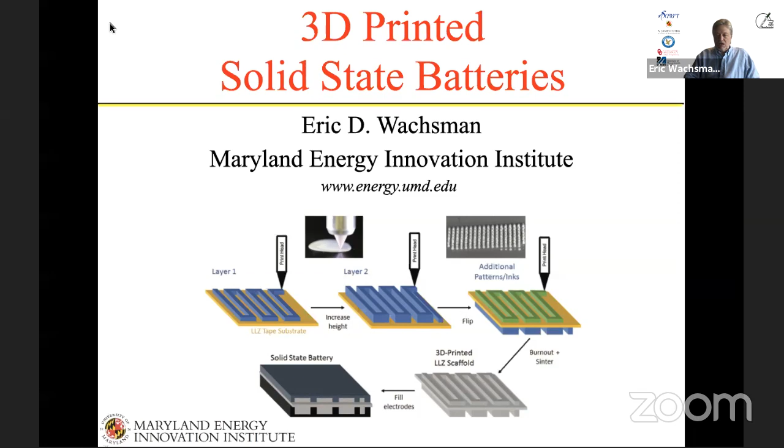As far as the range of cathode materials or battery configurations known in the world, this particular material is thermodynamically stable in contact with it, and again has conductivity comparable to some of the conventional electrolytes. They're made from relatively inexpensive elements, lanthanum and zirconium. Some of the dopants can be more expensive, but they're in a small quantity. And of course, there's lithium, but if you're going to have a lithium battery, you're going to have lithium, so that's no worse than any other.

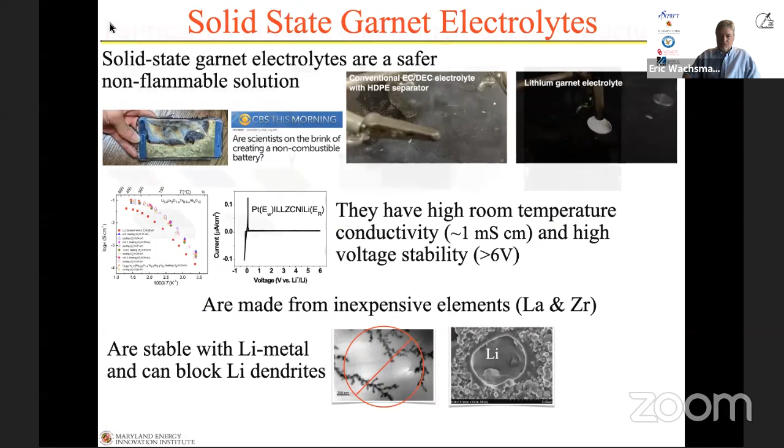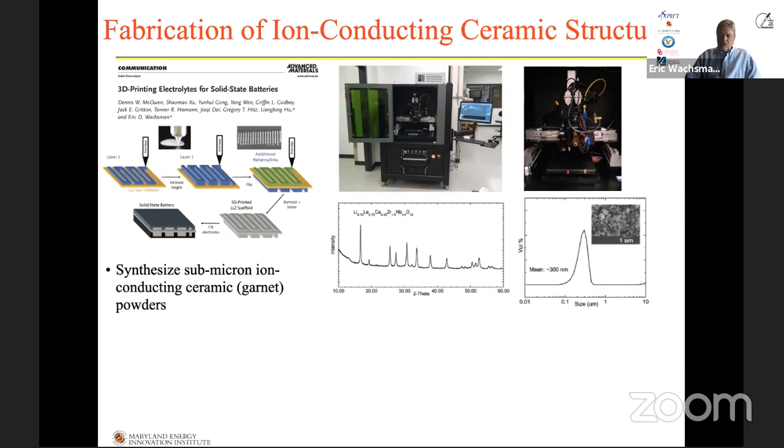The first step is to synthesize your ion conducting ceramic, in this case garnet, and there's the composition of one of them. They have to be sub-micron size, so you can see a volume percent versus size plot there, and an SEM image of some of the powders. They're on the hundreds of nanometer scale range that allows them to flow through the capillary on the 3D printer.

With these types of ceramics, we would then follow that with a drying and sintering step. I won't go into more detail, but typically they are sintered at around 1,000 to 1,100 degrees centigrade.

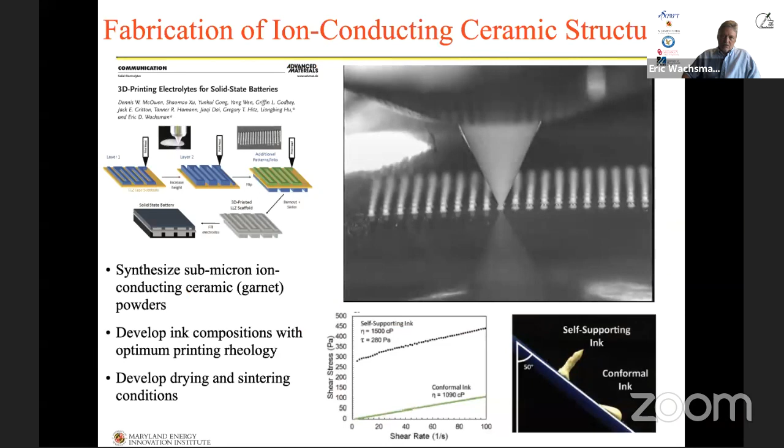There's a number of different structures we can make. This is what we call a tri-layer, with a porous, dense, and porous layered structure. In our batteries, we fill the porous structure with electrode materials, lithium metal on one side and whatever the cathode may be on the other. You want that separator layer to be dense to prevent shorts between the two different layers.

We also make bilayers, where again we have a thin, dense film supported on a porous layer. We've even been able to make self-supporting dense films on the order of about 5 to 10 microns using these types of materials.

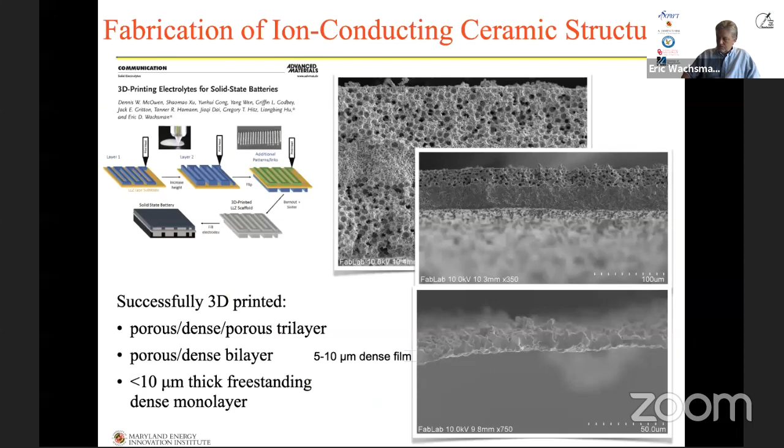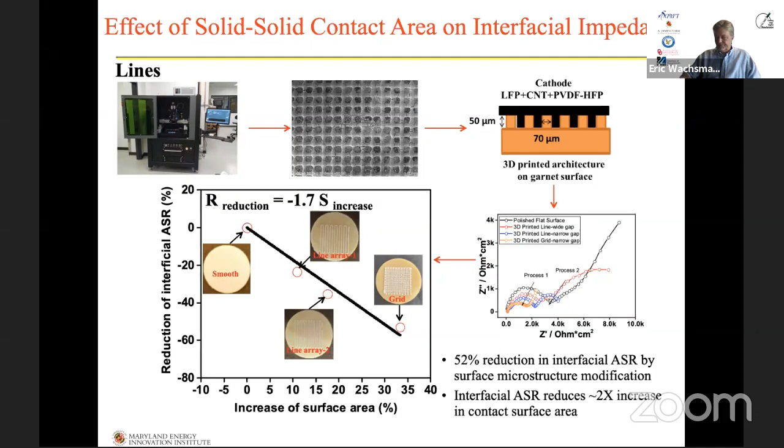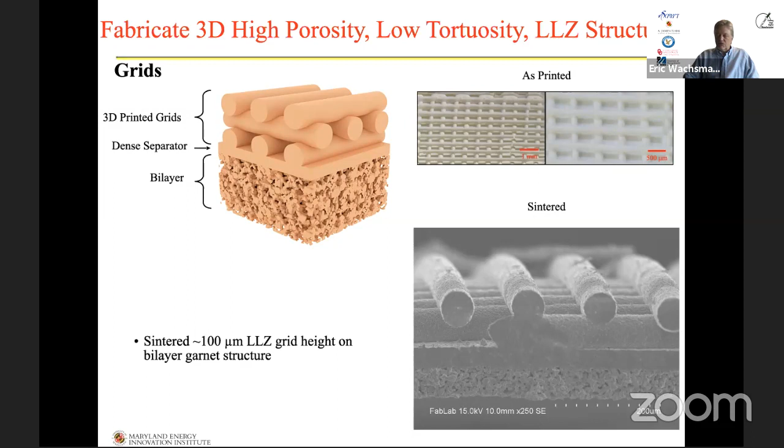They can cycle back and forth because of the high conductivity of these garnet materials. Moreover, the impedance of these things is very low, again because of the high conductivity of the material, but also because its extended three-dimensional structure allows for high surface area.

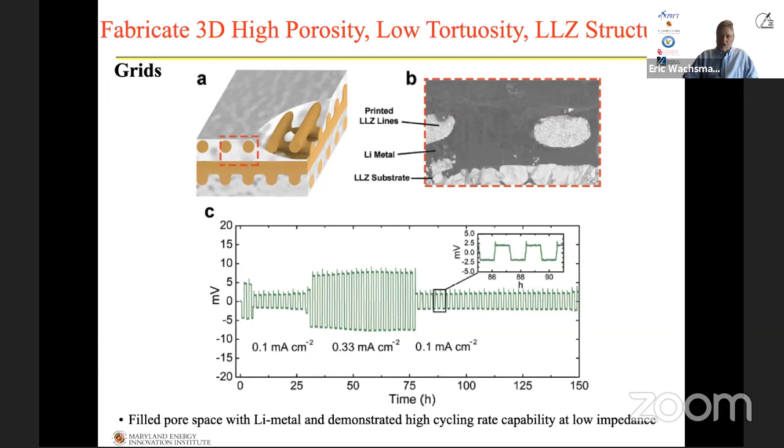This is another structure we made - these are columns. You can see the graphical representation on the left, the as-printed photograph, and the SEM images of these sintered structures. They're about 200 microns in height, very uniform across that surface.

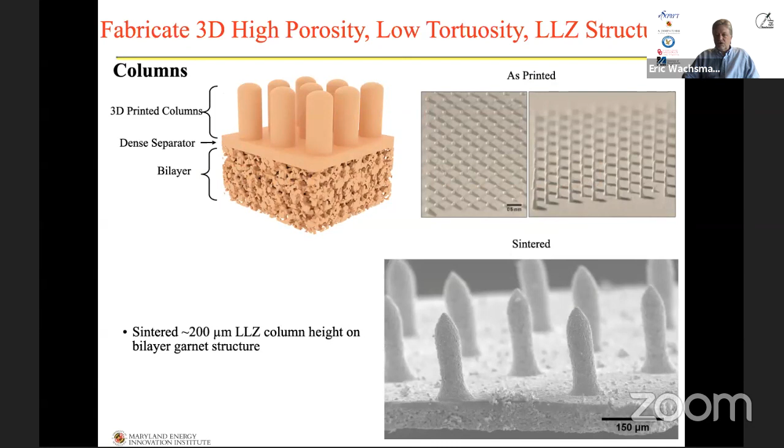Now what we're going to do is fill them with a cathode material that we'd use in batteries. NMC is a nickel manganese cobalt material. It's very common in batteries - one of the higher performing ones.

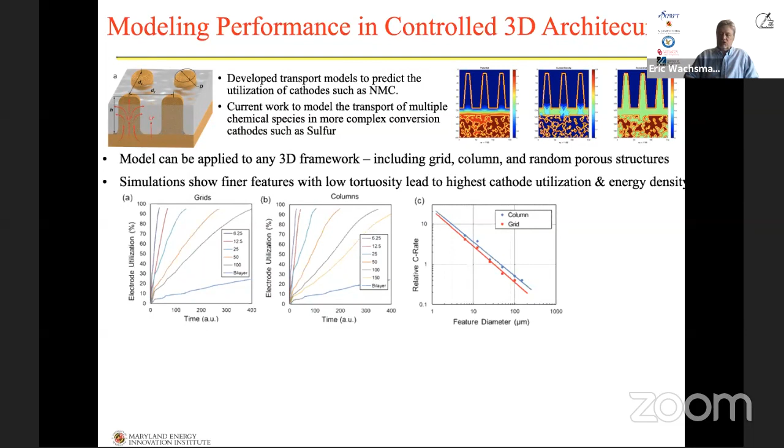That's shown in the figure to the right, the relative C rate. C rate for a battery is the charge rate, how fast you can charge and discharge it, versus the feature diameter on these grids and column structures.

The other aspect for grids is where do you place them? Do they directly overlap each other, or do you have them staggered? What we're seeing from the modeling results is you actually want to have the grid structures staggered, so that as you have these different lines, one line overlaps the pore on the layer below.

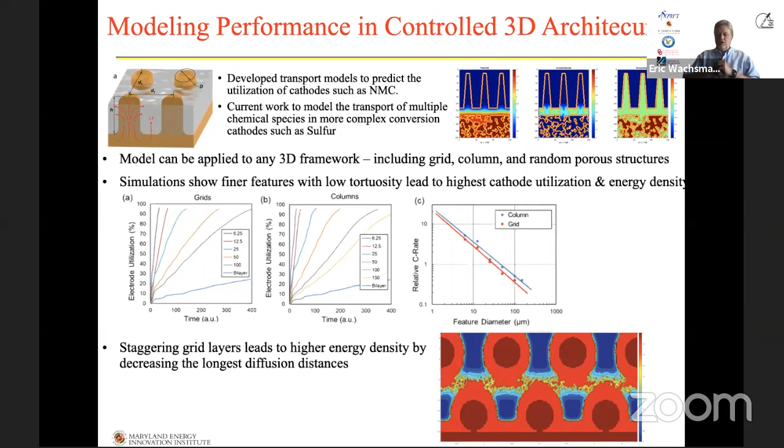Ultimately, we want to be able to calculate what type of energy density we would get. This is for lithium sulfur cells that we've been making, not 3D printed, but made using conventional tape casting and laminating and firing. We're making these lithium sulfur cells and getting on the order of about 280 watt hours per kilogram.

If you're familiar with batteries, your best Panasonic is somewhere around 240 or so. So it's actually a higher energy density than conventional batteries today.

But now we have the ability to look at how we tailor the porosity in these structures and how that affects the overall cell energy density. What we're seeing is that if we make this all 3D structure type battery, we can potentially get around 940 watt hours per kilogram, about 3-4 times that of conventional batteries on the market today.

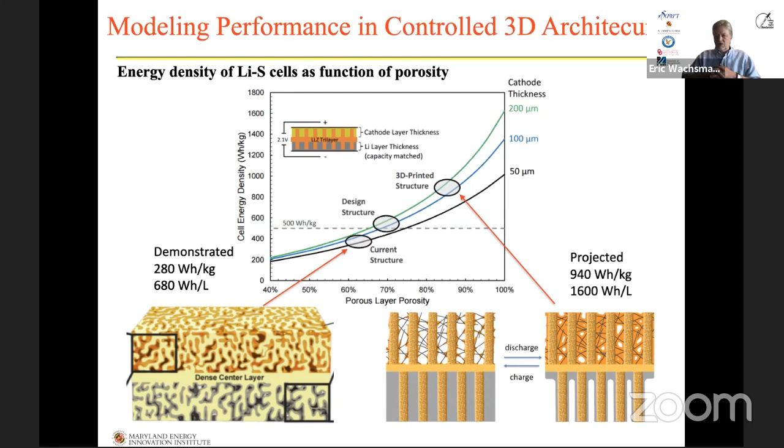I think I made my time. I want to thank the postdocs and grad students working in my group, as well as the Department of Energy for its funding. I thank you for your attention.

That was wonderful. Perfect timing, Eric. Appreciate that.

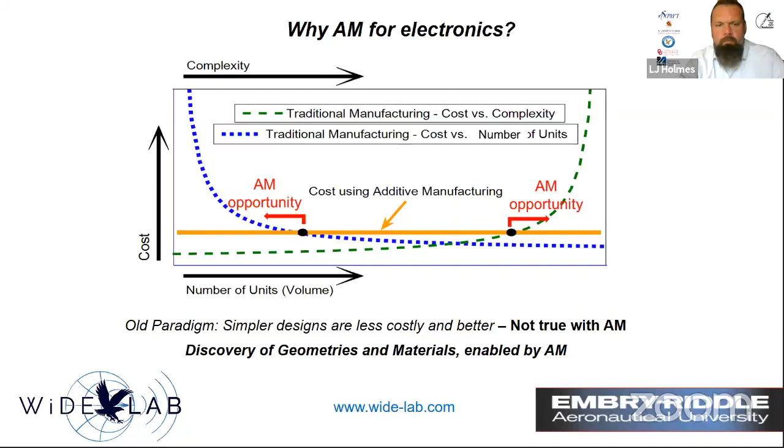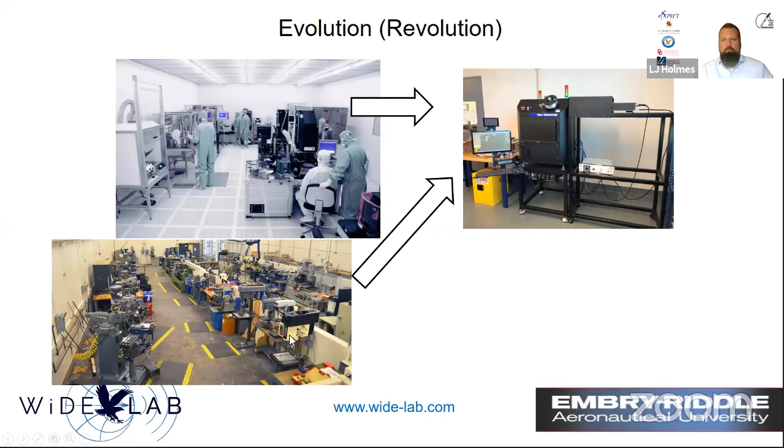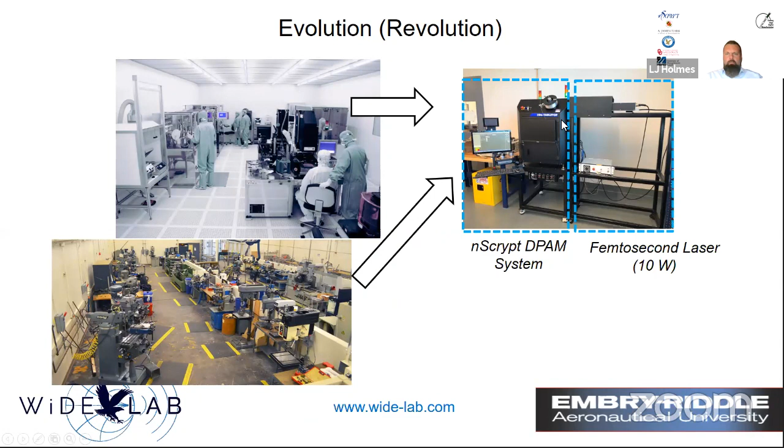So the evolution, or perhaps the revolution, is going from a clean room with a controlled environment, advanced multi-billion-dollar equipment and infrastructure, or a machine shop where you get parts and do subtractive manufacturing with all this equipment in a large room, to solutions like the nScrypt tabletop, where you can additive manufacture using micro dispensing or fused deposition modeling, or also do subtractive manufacturing, for example with a femtosecond laser, all in one system, going from a digital file to a part.

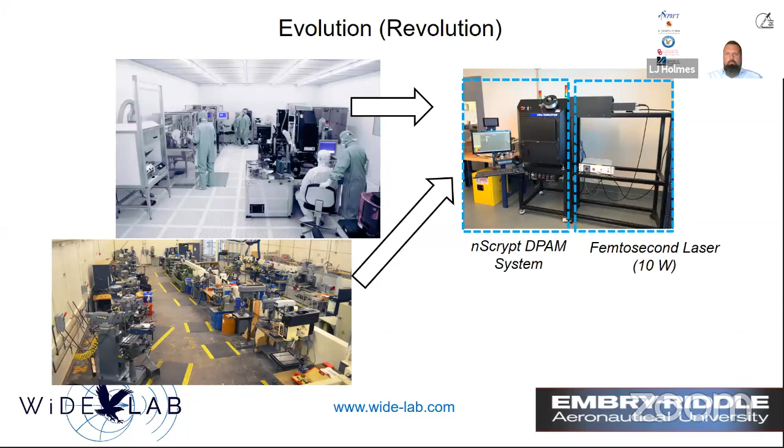So that's really what I call the evolution with additive manufacturing, or digital manufacturing in a more general sense.

A little bit about our lab. So we are at Embry-Riddle, in the John Mica Research Complex. It's a brand new building, as I mentioned, only 3 years old. We are here in Daytona Beach, and we have nice weather today.

And the lab, we have 2,000 square feet of RF labs on the second floor, as you see in the slides. Things we have been building since I joined: we have a picosecond LPKF proto laser for PCB manufacturing, RF probing, a far field anechoic chamber for antenna measurements, 12 by 12 by 25 feet. We can do S-parameter measurements and signal analyzer measurements up to 67 gigahertz, covering millimeter wave frequencies, for example 5G applications.

And then we have our nScrypt tabletop with a femtosecond laser, among other equipment. Of course, we are an aeronautical university, and we focus heavily on aviation, aerospace, and space applications. So we have in the lab a ground station for satellite tracking, actually 2 ground stations, so we can track 2 spacecraft simultaneously, at frequencies S-band, UHF, and VHF. And I'm going to talk a little bit about a space application shortly.

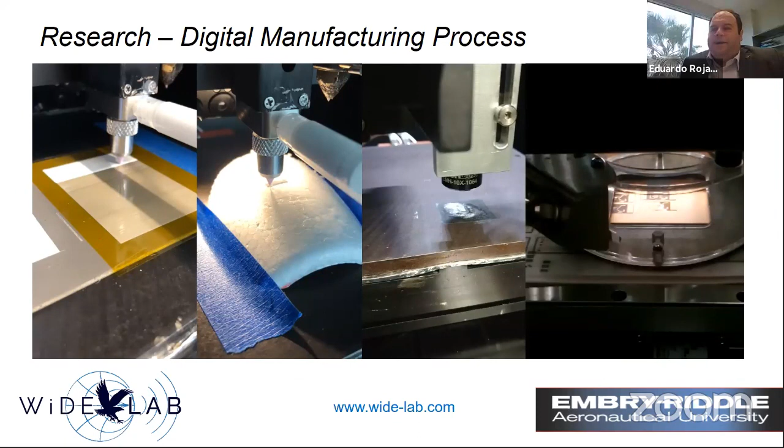So additive manufacturing, as I mentioned, enables manufacturing things that are not easy or even not possible to do with traditional means. And here's a set of videos of what we do in the lab.

So here is a foam frame of an aircraft where you can print conformal antennas and RF circuits, shown in the second video. And then we use laser, as you see in the third video, for fine features on the order of 10 microns, for obtaining those feature sizes needed at higher frequencies.

For example, for millimeter wave, you need smaller feature sizes. And as I mentioned, we have a more commercial LPKF system for PCB manufacturing, and we're also looking at processing of printed parts, as you see in the last video.

So as you see in the lab, we use both additive with micro dispensing and fused deposition modeling, but also subtractive with the lasers. I'm going to cover a few of the research initiatives we have going on in the lab.

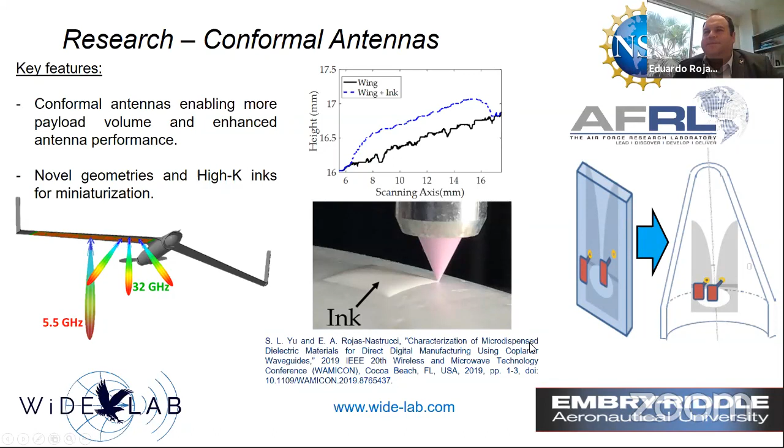Also, with our collaborator from AFRL, we're looking at moving planar antennas to 3D conformal surfaces, for example in radomes. The advantage is freeing volume inside the radome and moving things to outside of it, so you can use that volume for other purposes. That's the concept of conformal antennas directly manufactured on the surfaces.

Another initiative, funded by NSF, is bio-inspired antenna geometries, freeing our mind from the traditional engineer who thinks in 2D and going to 3D. We got inspiration from flowers for this one.

This is our very first work, published on looking at a patch antenna and making the pattern wavy. We effectively increased the electrical size while the physical size stays the same, so you get miniaturization of the antenna, going from this planar patch to a wavy flower-like patch.

You can reduce the operation frequency if you keep the same physical size, in this case from 5 gigahertz down to roughly 4.5 gigahertz, or miniaturize the antenna if you keep the same frequency. Here are the measured and simulated S11 and radiation patterns, showing the behavior is very similar.

We also collaborate with colleagues from the aerospace engineering department on space applications. One issue NASA and the space community are looking at is orbital debris and micrometeorites. As there is a lot of debris around Earth, there's a high risk of impacts from these micrometeorites or orbital debris.

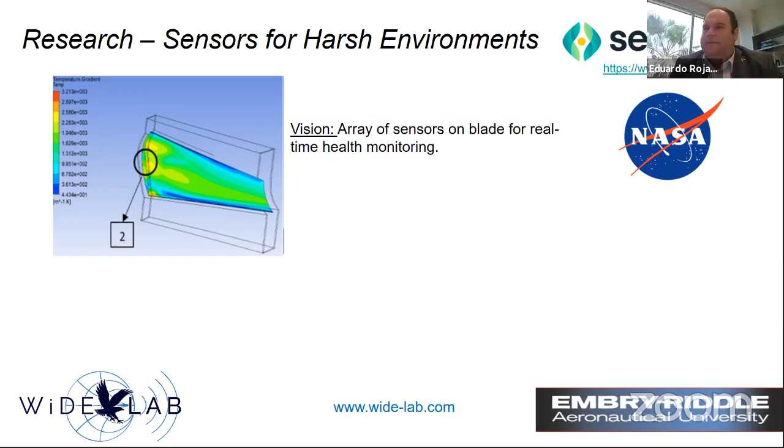That's really the vision of the company, and we're working with them on using additive and subtractive manufacturing, which is imprinting patterns with conductive ink and laser machining cavities and features to fabricate these high temperature and pressure sensors. You see here examples of the samples we have fabricated with them.

And Eduardo, you've got about 2 minutes. Okay, so I'm going to move faster then.

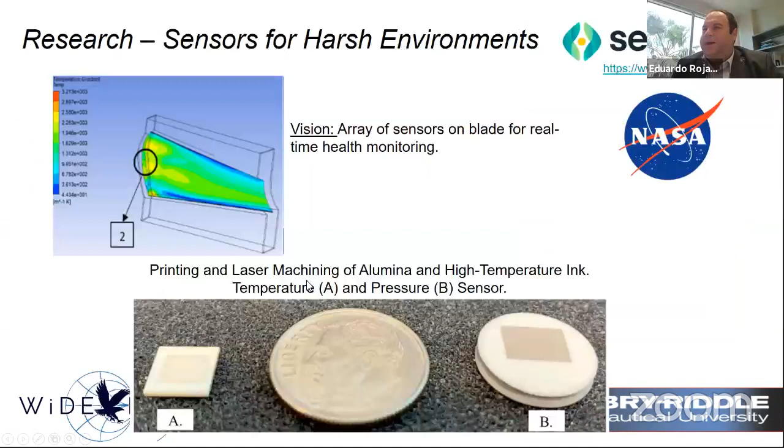We are working with Intuitive Machines, which is also working with NASA and the CLPS program, to make a lunar lander that is going to the moon, hopefully next year in the fall. So we're working with them on the wireless systems, both to Earth and on communication on the lunar surface. Unfortunately, I cannot share much details, but we are also working on an ISS experiment that will launch in October. So this is, I guess, a tease, and we'll share the details in the next edition of these seminars.

I guess the vision is, on Earth, we can discover novel geometries and materials that are enabled by additive manufacturing. So there's a triad there — they are interconnected: geometries, materials, and additive manufacturing processes to advance society. And then from the space point of view, ad hoc design and manufacturing is really an enabler for space exploration. There's no way you can have a stock of parts in space, and if you have a problem and don't have that part, you have to wait months or years until you get it there. So the space industry is really focused on additive manufacturing as an enabler of space exploration.

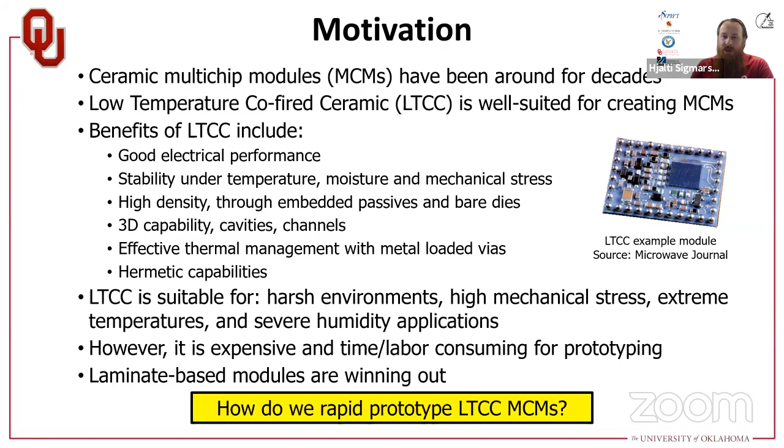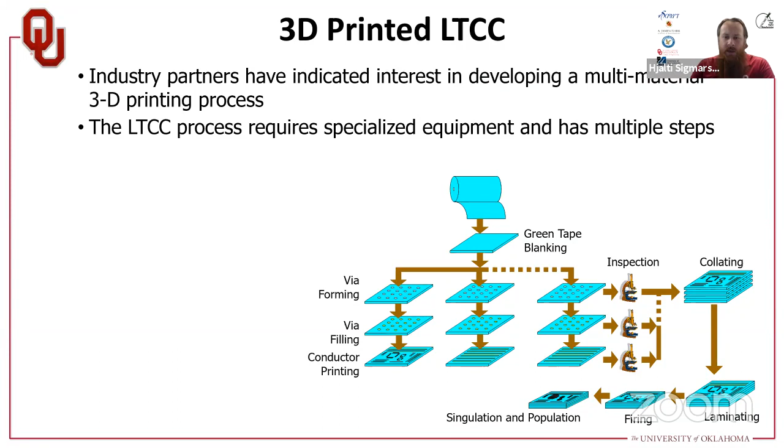To do that, we need several things. Just to emphasize the complexity of the LTCC process in general, it requires multiple steps, usually multiple machines. You have to take your parts from machine to machine, with very specialized labor for each step, and overall it's just a fairly complicated process.

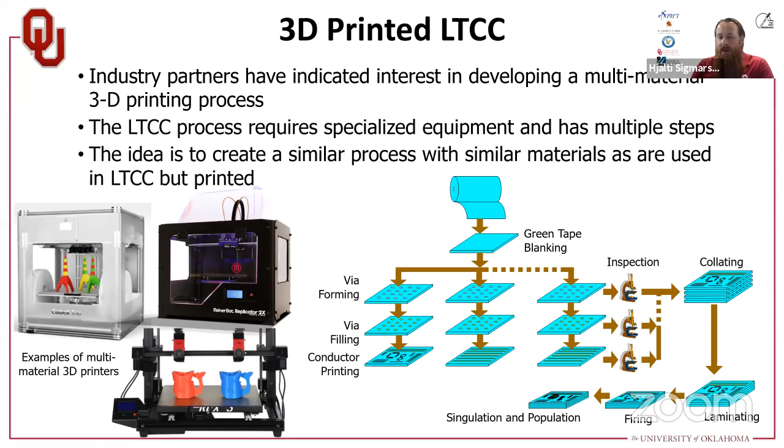So the thought process is, can we somehow utilize some of the evolution of 3D printers? We started seeing a lot of multi-material printers, like fused deposition modeling printers that print multiple filaments or materials at the same time. Can we emulate this type of process with ceramics?

There are several challenges we need to overcome, listed here in no particular order other than what came to mind. One of the big problems is materials - we need multiple materials to create a multi-chip module.

We need dielectrics for the substrates, and conductors for making the interconnects and vias. We also want some more advanced materials and other dielectrics, high K materials - I'll talk more about the advanced materials in a later slide.

Some concerns have to do with the particle sizes of our materials. If we're going to extrude or dispense, we need to be mindful of particle size, which also dictates our grain structure, porosity and such.

The printing platforms themselves, although with all these low-cost 3D printed FDM printers being widely available, they're potentially just not good enough for high frequency, high quality circuits. Current LTCC processing deals with about 2 to 4 mil lines and spaces, about 50 to 100 micrometers, while typical FDM printers might be dealing with 10 mil, 20 mil holes and dispensing capabilities. So we're not going to use a $1,000 printer to make LTCC.

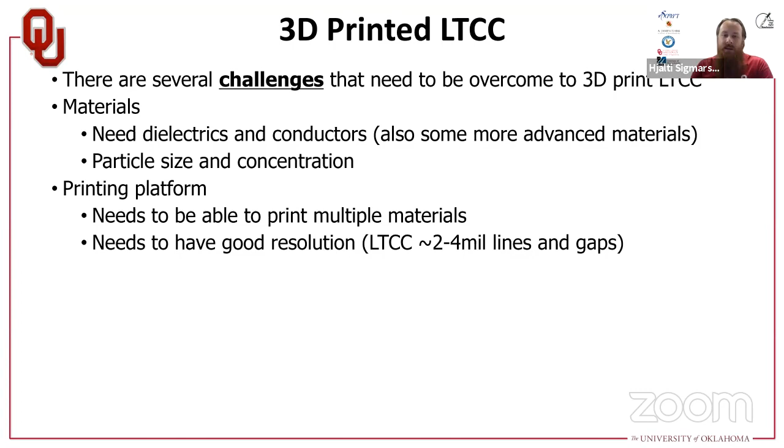We know that. So what do we need? Well, we have a lot of other platforms, and I'll talk about that in a little bit. One of the major challenges of doing 3D printed ceramics - and this goes a little bit to our first speaker's discussion on drying and sintering - cracking is a major challenge for 3D printed ceramics and sintered ceramics.

As an example, or for comparison, in traditional processing of LTCC, the tape itself is dried in very well-controlled conditions for a very long time, and there's a reason for that. The sintering process is also relatively slow - drying and sintering can take a lot of time.

So one question we should ask ourselves is: is it really feasible to try to print these things, given all these challenges? Should we solve these challenges or not? As academics, of course, we want to tackle these things - it gives us something to do, I guess.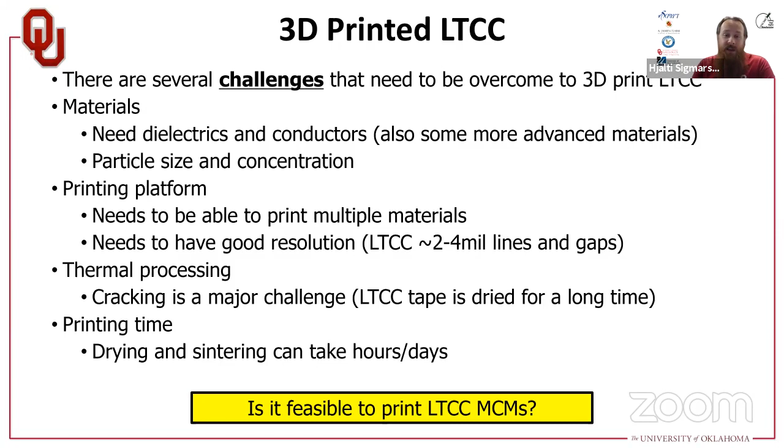So what we've done here is we started off with some materials from Heraeus. We had this X200 powder that they make tape out of. We went and sourced the raw materials from them, got the powder, put that into a liquid suspension using the monomer with some dispersant, and mixed it up pretty nicely. Then we put it in a syringe and dispensed it, and we were able to create relatively decent sized boards - about 50 mil thick, if I remember correctly.

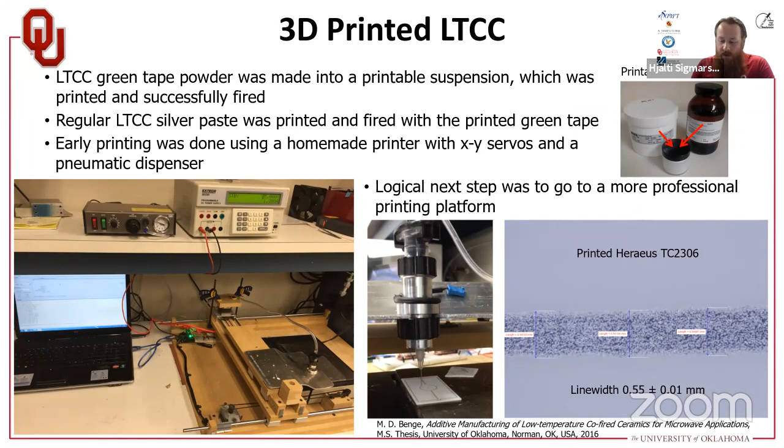We used a pneumatic dispenser with some servos and created this little printer that we see in the middle. We were able to print both the ceramic suspension and, on top of it, the conductor paste, and fired it all together, and it actually came out quite nice. However, the homemade printer just isn't good for high accuracy. We had okay accuracy, with a repeatability of about 10 to 20 micrometers on these printed lines.

So recently we got an nScrypt printer, one of these gantry units, which was funded through the Air Force. Big thanks to the Air Force through their DURIP program. We ended up getting a 3Dn-300 printer with 4 smart pumps. We decided to go with 4 smart pumps, and I'll talk about why in the next slide.

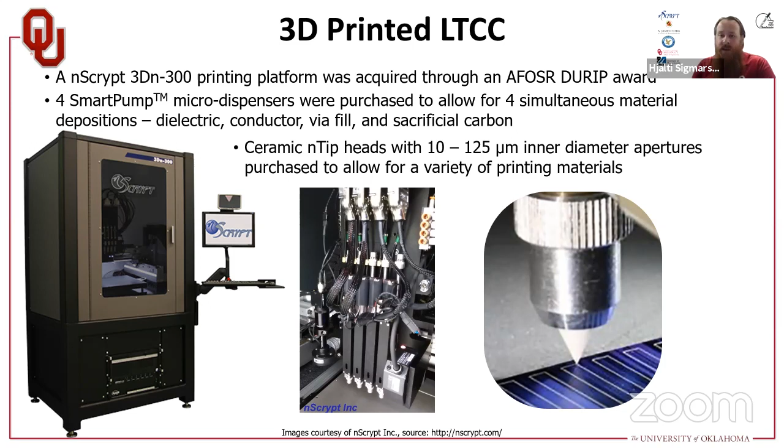In general, we wanted to be able to put down 4 suspensions at the same time, so we can do our substrates with our dielectrics, our connections, and actually use a different conductor for the via fill, since it needs a different sintering performance. So we fill vias with a different material, and also use sacrificial carbon, which I'll explain later. We also got a variety of ceramic tips, and we're experimenting with which suspension works best with what inner diameter aperture.

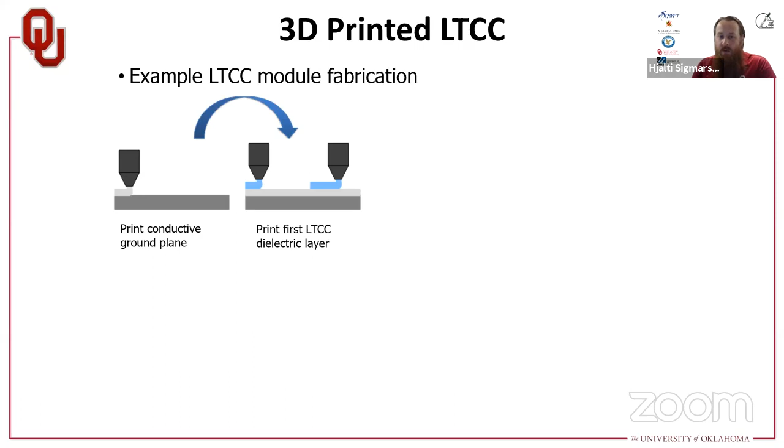So how do we envision doing this module fabrication? If we start off by just printing a ground plane, for example, assuming we're building some kind of circuit, we start by printing our layers—maybe print a conductor layer, then print some ceramic, some LTCC, on top of that.

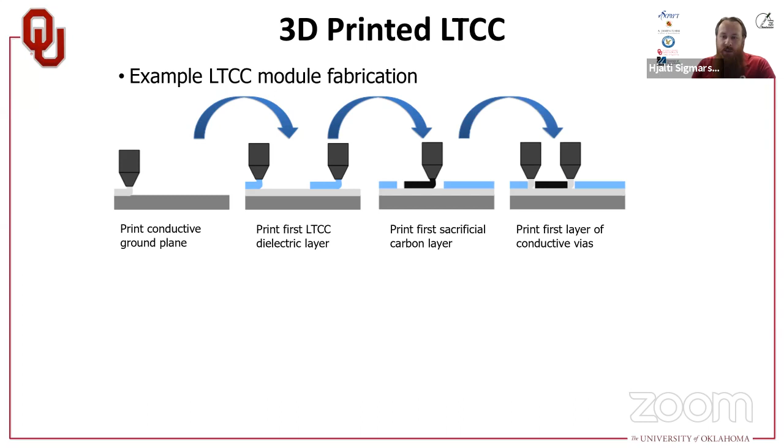Here's an example where we'd put down a sacrificial carbon layer if we want to create some cavities or channels. We print some carbon in there, continue filling vias, and that repeats—we keep building layer by layer until we end up with a complete part. Eventually we fire that part, and during firing, the carbon paste actually burns out quite nicely.

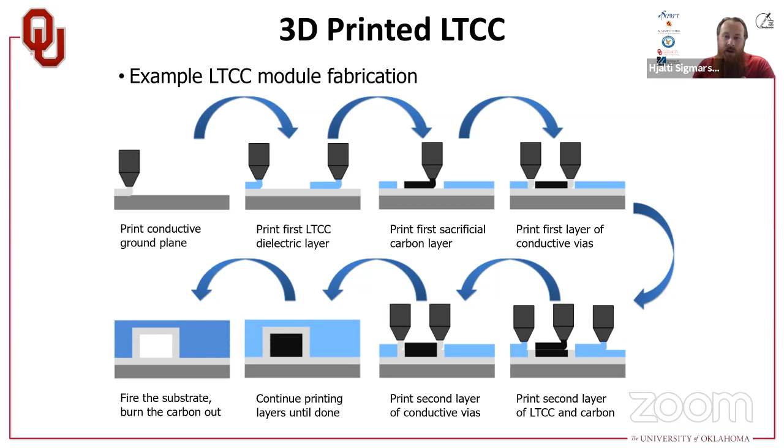So the idea would be to create some kind of module like this—a printed TR module, or transmit-receive module, where we end up with pockets for chips, embedded components like inductors and capacitors, and multi-layer antennas built right into the board itself. That would be the ultimate goal: to build everything into one thing.

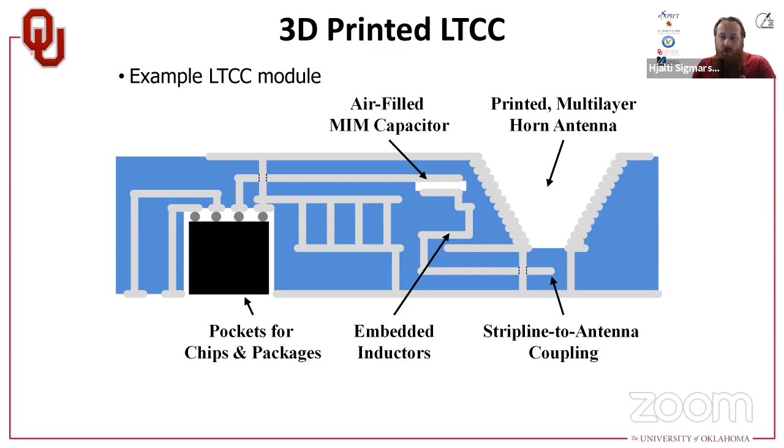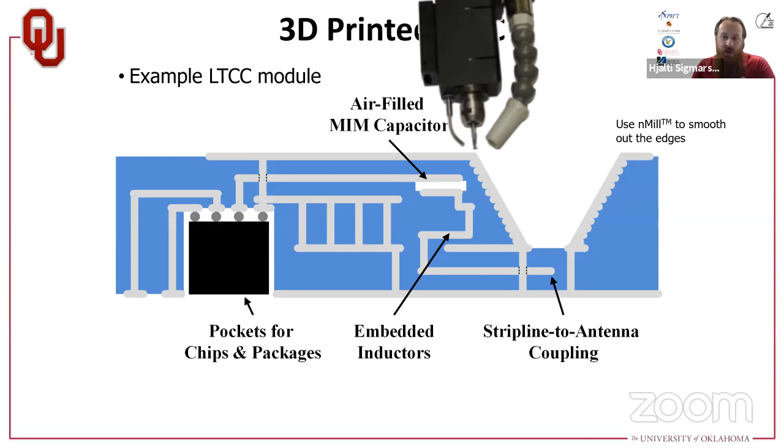Now when we do stuff like this, we end up getting a certain amount of surface roughness. This is where a platform like the nScrypt comes in and could do wonders—let's say we use the nMill, a milling head that can be added to it. If we smooth out the antenna, for example, we could potentially get much better performance at higher frequencies, since surface roughness greatly impacts performance at those frequencies.

Another project we worked on with LTCC-type components was: what if we use our $1,000 MakerBot—or really more like a $2,000 printer, though I'll say for the record I bought that particular MakerBot 2X for $900 used, so it is a $1,000 printer. But can we make filaments with ceramics in them and actually create ceramic parts?

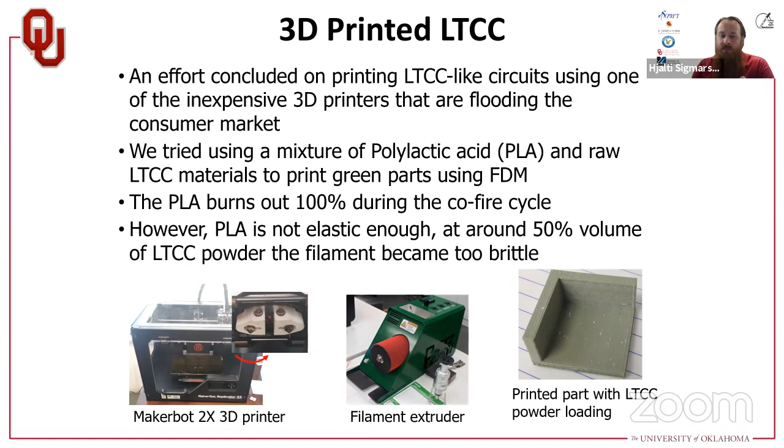First we started with typical polylactic acid, PLA, but the problem was it was just too brittle—we couldn't get high enough ceramic loading into the plastic to burn out the PLA and be left with a good enough ceramic matrix that would sinter rather than fracture into dust. So we moved away from PLA into PETG, which is way more elastic, and we achieved about 71% filling of powder with this Heraeus X200 powder into a filament. We were able to use a MakerBot printer to print a part, fire it, and get some nice parts out of it.

So that was actually quite exciting, being able to print out of a $1,000 printer a ceramic part. This is just a graph showing the different profiles we use. We have to slightly adjust our profile for doing the sintering for the PETG, needing a bigger dwell to remove all the particles and doing it a little bit slower.

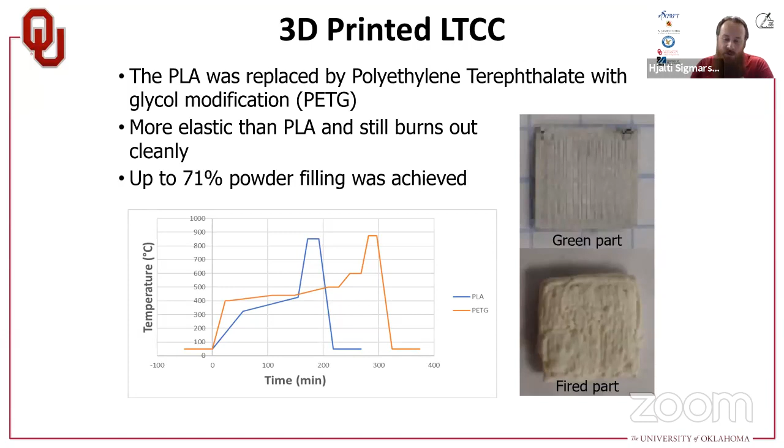So what about other materials? I hinted at doing some more advanced materials earlier. It'd be nice if we could start printing materials like ferroelectrics that allow us tunable things, magnetic materials, ferromagnetics, some piezoelectrics. If we can print things that are functional after printing, with physical movement, that would be nice. And then there's phase change materials.

Phase change materials are basically a family of materials where, by doing some thermal excitation with different profiles, you can change it from being an insulator to a conductor and vice versa. This has been a hot topic recently for doing RF switches, with very good performance, low loss, and good isolation.

So Doctor, you have about 2 minutes if that's okay. Yeah, okay, I mean I can speed up a little bit.

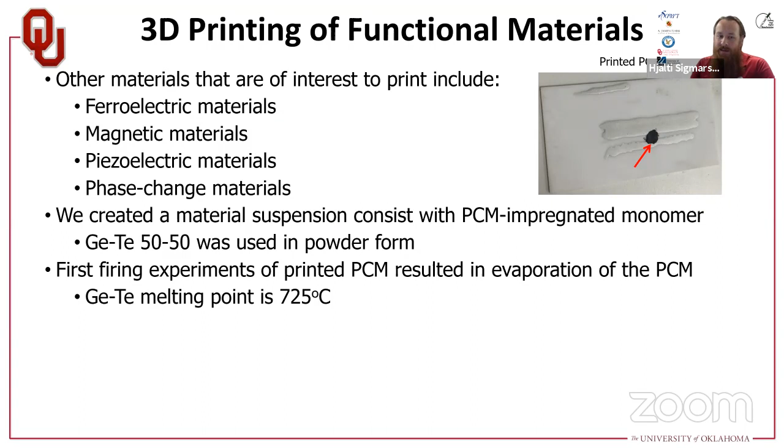Anyway, so we took the Ge-Te 50-50, which is good for getting low loss, and we put that into a monomer as well, and we tried to print that. However, we failed to take into account that Ge-Te actually melts at 725 degrees Celsius, and the LTCC process is about 850, so we ended up evaporating all of our Ge-Te. But still, it's something we want to be looking at.

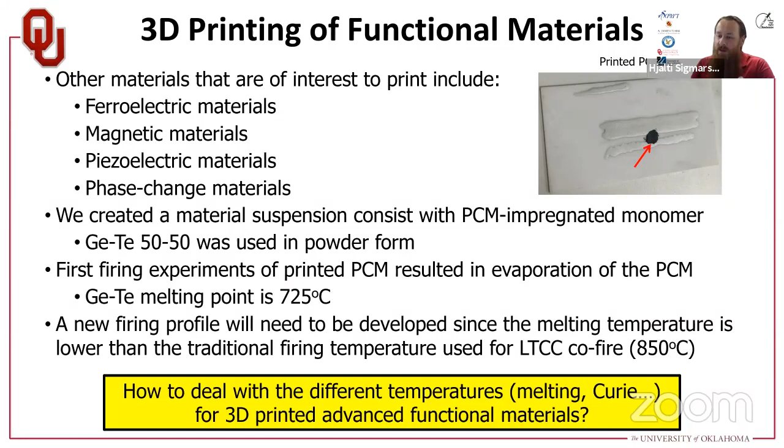It would be pretty cool to print all these different materials, but there are challenges, like how do we deal with these different temperatures? If you're printing a piezo material, for example, you can't sinter that at 850 degrees potentially without destroying the piezo effect of the material. So there are all kinds of considerations that need to be taken into account.

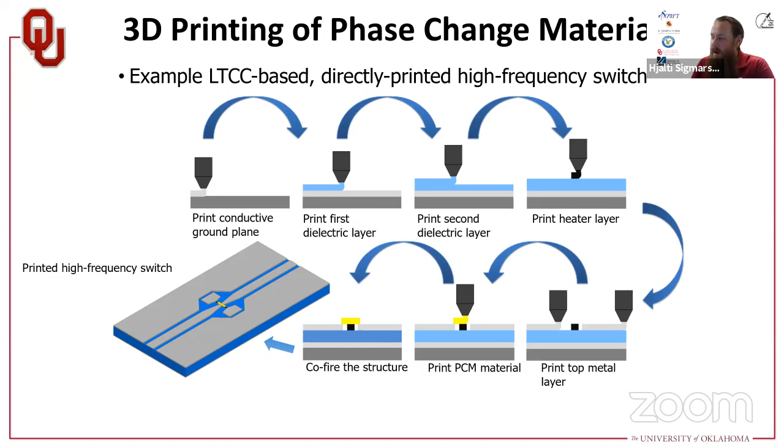If we had a good material to build a switch, we could go with our regular printing process. We add a heater paste, maybe a tungsten-based paste, then build our PCM or phase change material on top of that, and fire the structure to end up with something like this, a typical RF switch which allows us to either block the energy or pass the energy, which would be really nice. So we made some structures.

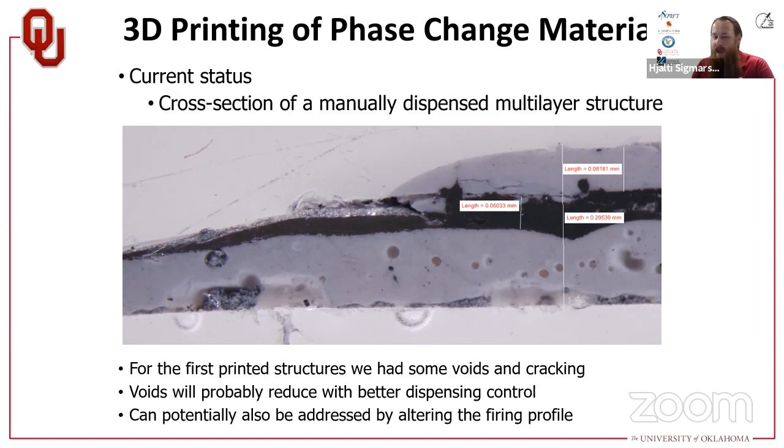In our early discoveries, we basically have a lot of cracking and voids from the handmade process, so we still have to work on that a little bit.

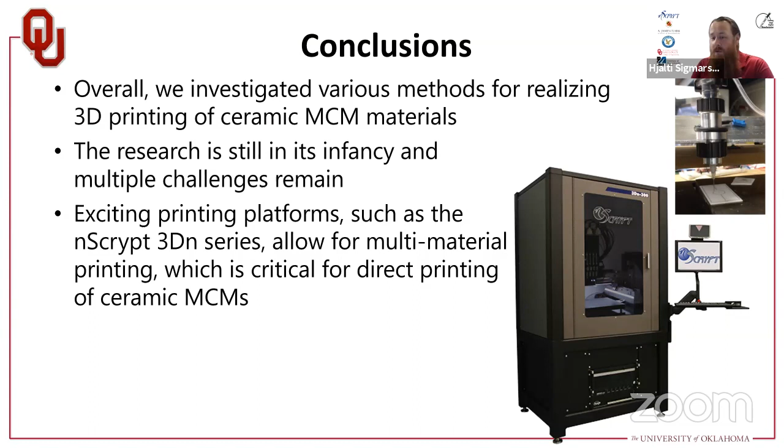So overall, to conclude quickly: we have made some of these materials, still have some challenges of course, but with these new platforms, and we're really excited to start using our nScrypt for this, we have high hopes for building some really cool modules with this. Again, thanks to the Air Force for the nScrypt printer, and to Heraeus for providing us with all these materials.

Thank you, Doctor. Thank you.

Just a quick comment about the Raytheon UMass Lowell Research Institute. We stood this up late in 2014. This is a fairly unique partnership between an academic organization and a company. Raytheon is very close to our campus, and so we have a lot of engineers who have offices and work with UML faculty and students.

Our projects are funded through some internal IRAD funds at Raytheon, and also some federal funds that you see here on the left: ONR, ARNI, AFRL. We've also been supported by projects with America Makes and NextFlex, and more recently we have something going on with the NSA as well for some of the authentication work we're doing.

This institute was stood up with the idea of helping Raytheon develop technology to go from these large rigid phased arrays that you see here on the ship in the upper right to something that looks more flexible. So we've been doing this for about 5 years now.

And shortly after we stood up RURI, we also stood up another organization called the Printed Electronics Research Collaborative, or PERC. This was an opportunity to build up the supply chain. Raytheon, as a system integrator, isn't going to develop inks or design tools.

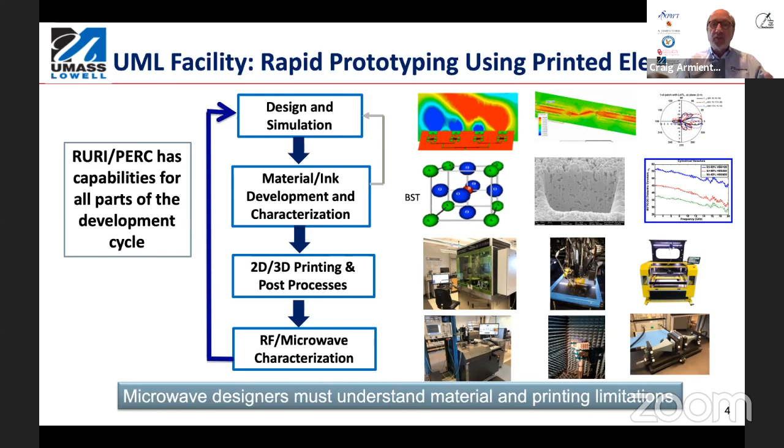So our lab is shown here, various pieces of equipment. Here you see this little video - that's our Voltera PCB printer, which we're using for a variety of applications, most notably printing RF connectors and printing interposers for microelectronic packaging. We've got the Optomec system, the 5-axis system, so we can print very fine lines on 3D objects. A multitude of 3D printers, including this yellow guy here, a large 5-head 3D printing system, and all the usual ancillary materials: photonic curing, profilometers, and so on.

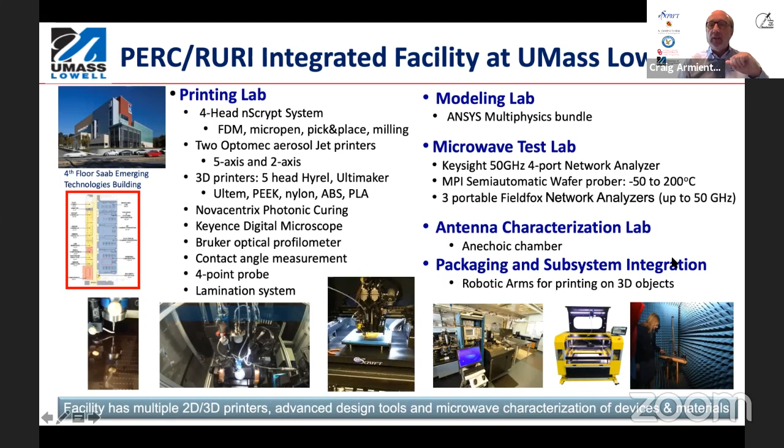In addition to the modeling tools I mentioned, we have everything that ANSYS makes, and all of our students know how to use those tools. We have a fairly complete microwave test lab, including our own anechoic chamber.

So a lot of discussions both today and last week about materials, and I'm not going to rehash all over that. But I just want to say that we're all after better conductors. However, it's even more of an issue at these high frequencies where surface roughness and edge acuity is very, very important.

One of our biggest challenges is getting good dielectrics that have low loss at the very high frequencies we work at, and good control over thickness. So I'll mention that later. We have an extensive ability to do materials characterization. You can't get dielectric properties of a lot of these inks and materials at high frequencies. The vendor's not going to give them to you, so we measure those.

There's a lot of other things here, including integration of 3D materials, FDM kinds of materials. I'll talk a little bit later about why we want to change the way we do connectors as well. And the last bullet, we're developing new materials for frequency agile systems. We've developed an ink I'll mention later on - it's a ferroelectric material that allows us to tune the dielectric constant of the material. And we're also developing some new materials for applications in technology protection, anti-tamper authentication, which I think is very amenable to the additive world.

Here's an example of some of these things we've pieced together. This was actually done with Raytheon, who was the prime on this America Makes project. This was a C-band phased array element where we integrated a variety of different printed devices in the microwave region. This happened to be on a Rogers substrate. What you see here are things like a phase tuner, quadrature couplers, and I'll talk a little bit more about that. We've got some gallium arsenide chips in here where we've interconnected them with a printer, not wire bonds. We have a bandpass filter and antenna all integrated together. So we worked on these elements separately, and then we put them all together on this America Makes project.

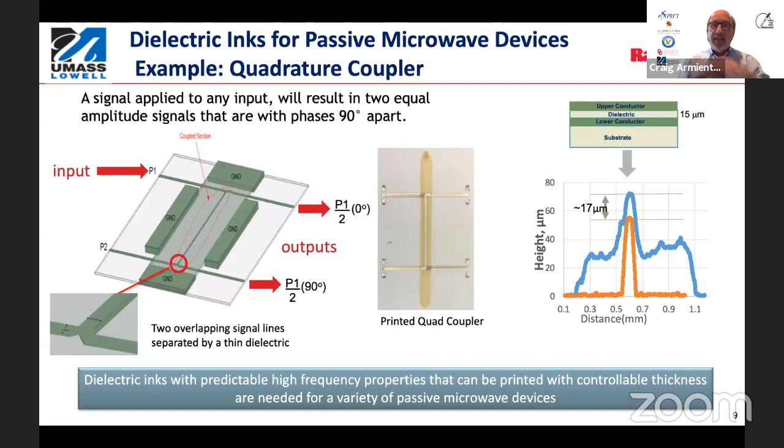Just to talk about one of those elements that speaks to the challenges for dielectrics - this is a quadrature coupler. You put an input on the left side, it splits out into two and shifts by a 90-degree phase. What's required is you've got these two metallic lines with a dielectric in between, you see a cross section here. The dielectric constant and that thickness has to be well known and controlled to be able to design and fabricate this with a set coupling. And that's a challenge right now, how do we get these dielectrics deposited in a way that's very controlled. That's just one of the many challenges of dealing with some of these materials.

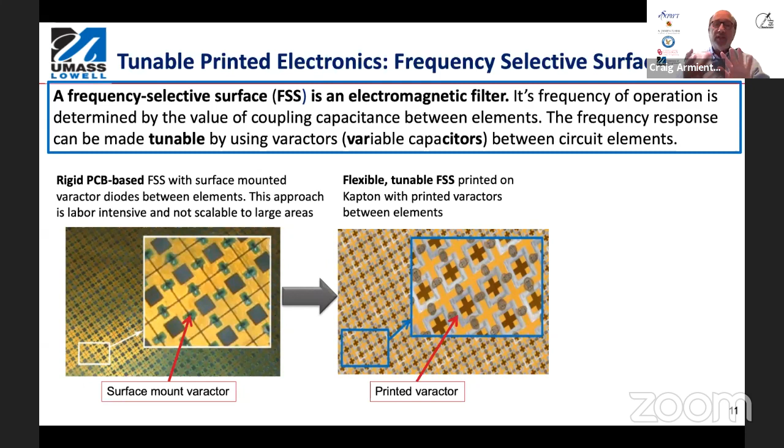So we've done a lot of work with different formulations of this BST, and we've used it to create what's called a frequency selective surface, or FSS, which is basically an electromagnetic filter. Based on the size of these unit cells, you can fix the frequency response of radiation going through that.

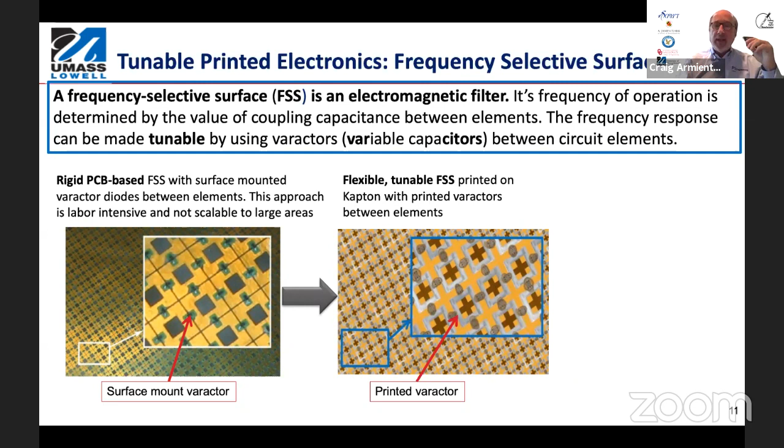What we've done is taken the extra step and connected these unit cells with an interdigitated capacitor, which has our tunable dielectric material as the dielectric. As a result, you can see in this photograph we have a flexible and tunable FSS structure, whereby changing the voltage across it, we can tune the frequency response. So again, this is a novel material enabling tunability that isn't available commercially.

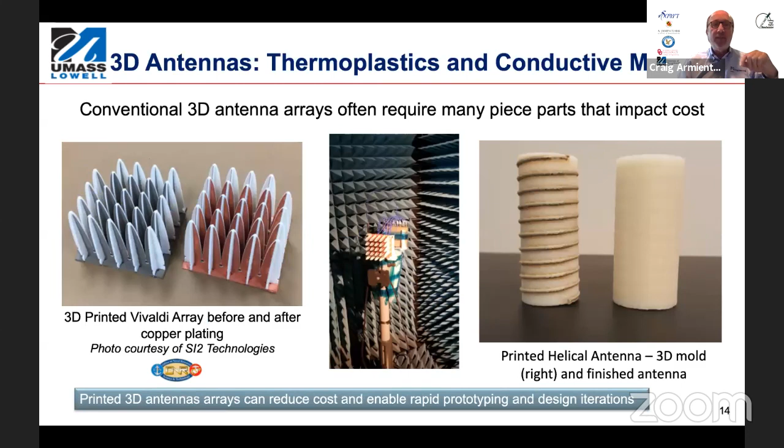We've done some work in the third dimension. This is a Vivaldi array we did for ONR with our partner SI2 Technologies, a broadband X-band array of antennas. A lot of interesting challenges to making that, and here you see it in our anechoic chamber.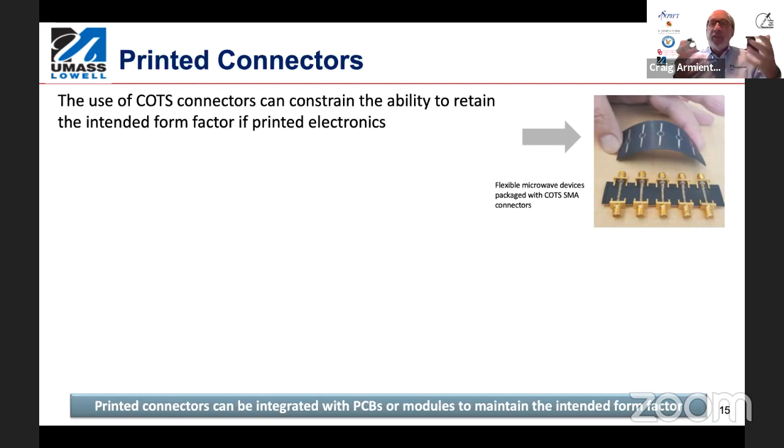We've also done some work on printed connectors. You've seen these very nice flexible circuits like you see here—it's just a simple case of a bunch of microwave resonators. What do we do to that? We then attach these SMA COTS connectors, which really need a metal plate in the back because the sample is too thin and too flimsy. And all of a sudden, what was lightweight and flexible is now heavy and rigid.

In closing, we've got a great team of folks from Raytheon and UMass Lowell. Dr. Mary Herndon is my co-director on the Raytheon side, and Professor Alkim Akyurtlu is my co-director on the UMass Lowell side. Every one of these folks has made incredible contributions in materials and the RF world. I think I'll end there, as I'm sure I've run out of time.